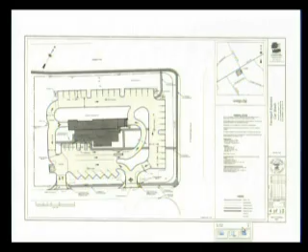As we indicated in our email, we've been trying to implement various aspects of the plan since it was adopted in December 2012 by the Planning Commission, and something we're working on right now is bringing about a downtown, which is one of the key strategies in the comprehensive plan. It was in fact the most important strategy identified by the public as part of that comprehensive land use plan process. There's a policy statement in the plan on page 5 which says that all town decisions should be consistent with the comprehensive plan.

If you have a project that's proposed to be inconsistent with the plan, either that needs to be amended or the plan itself needs to be amended. Since the Planning Commission did adopt the plan, we feel that decisions that come before the Commission should be consistent with the plan, or the plan needs to be amended in that regard. The staff would recommend to deny this site plan at this location because of its inconsistency with the comprehensive plan and the fact that the town is currently working on blending the comprehensive plan with the zoning in the mixed-use town center area. Also, we have reviewed the site plan.

The comments are at your places. There are a lot of comments left, 30 items. Many of those are administrative, and some of them are reminders, but that's still a lot of comments that typically in and of itself would be grounds for denying the site plan. That's kind of an overview of this project. I know the applicant's here and they can discuss any specific questions if you have any.

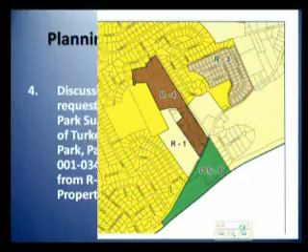Moving on to item number 4, discussion and public hearing on a request to rezone Villas at Anchor Park subdivision, located on the north side of Turkey Creek Road across from Anchor Park, parcel 59, tax map 152, and parcel 001-034, tax map 153 IB, 29.17 acres, from R-4 to R-1 OSMR.

Saddlebrook Properties LLC, applicant. This rezoning was actually approved last month, and it's my fault that it's back here before you because I forgot to include a resolution. Although by state law all that's really required is the action taken last month, which was unanimous, with no opposition or concerns about the requested rezoning, our practice has always been to approve an ordinance through a resolution, so that's why it's back before you this evening. I can review the request if you want - I know 4 of you were out last time.

Basically, the property is currently zoned attached single family R4, similar to Park Place behind us. The request is to go to R1 OSMR, which allows attached and detached, and requires at least 35% open space. So the result of the rezoning would be less density and a lot more open space. Although this proposal by this applicant would be all detached structures, the character is still consistent with the land use plan. So staff recommends approval of Resolution PC-14-05, which recommends approval of Ordinance 14-10.

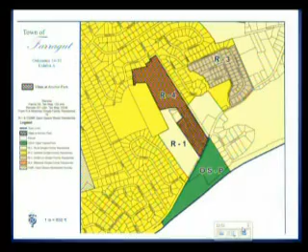Item number 5 is discussion and public hearing on a concept plan for Briarstone subdivision, formerly the Villas at Anchor Park subdivision property, located on the north side of Turkey Creek Road across from Anchor Park, parcel 59, tax map 152, 29.17 acres, Saddlebrook Properties LLC applicant.

This is related to the previous item, the Villas at Anchor Park property. As I mentioned last month, in order to proceed with developing the property under a different zoning district, they have to change the concept plan, the preliminary plat, and the final plat. The concept plan before you has 56 units and 40% open space, so it satisfies the density and open space requirements for the R1 OSMR.

There's one existing attached building that has been constructed in the development, on the south end. Right there, very nice building. But the developer has found it will be more marketable to build detached structures, and the OSMR zoning district allows the attached building to remain compliant while allowing the developer to build detached dwelling units in the remainder of the development. That hopefully will blend in. I'm sure it will, they build very nice looking houses, so it should be compatible.

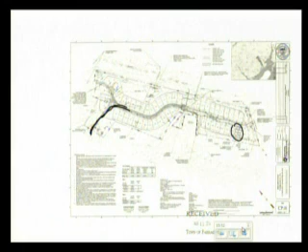In the fire code updated as part of the 2012 codes we adopted in 2013, there's a requirement that where you have more than 30 dwelling units, you have to provide a secondary access. So that's the main comment. The other comments are at your places, relatively minor, but staff strongly encourages a vehicular connection into the property.

We have a number of subdivisions that have that and have had it for years: Fox Den, Village Green, Country Manor, all three are connected. Sequoia Hills in the city of Knoxville is very interconnected. It has a mixture of all kinds of housing types, even commercial, schools, and all kinds of things like that. So it's good planning practice to try to connect where possible.

In this case, it's very possible. You have two roads stubbed out into the property, and it's consistent with the plan. I know the applicant does not agree with me, but that's okay. That's the staff's position on this particular concept plan. Other than that, we recommend approval subject to the conditions at your places.

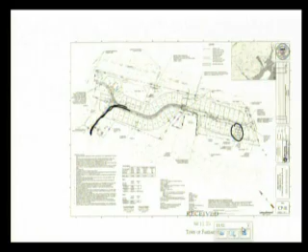Hi, I'm Bob Money. I'm the president of Saddlebrook Properties, and we're at 122 Perimeter Park Drive.

We have not acquired this piece of property, so this is all contingent upon what happens tonight. But what we plan to do on the piece of property is build our product much like we've done with Baldwin Park on Boring Road and the Cove at Turkey Creek. Our market is mostly empty nesters, young professionals for maintenance-free living.

To acquire that buyer, one of the things they are very concerned about is the safety they have in their community. People buy in maintenance-free communities as empty nesters. They're looking for a place where they can lock it up, leave, their yard is taken care of, and it's a safe environment. This was already approved for 99 units without a connection to the rear property.

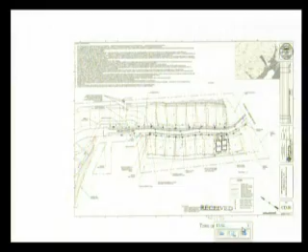So staff recommends approval of the preliminary plat, subject to the 9 comments at your places. Do applicants have anything to add? No, he covered it pretty well. They graded those duplexes with about a 3-foot step in them, so we need to go back and make single-family lots, and there's a handful of either water or sewer service meters that need to be relocated with the new lot lines that we're working with First Utility District on. So you're okay with the $50,000 letter of credit and all 9 items? Yep, we're fine with all 9 comments.

Any comments from the commission? The haul route that is being referred to on item number 6 - can you put that up and show us? Yes. Is that doable? Is that going to work when you're obviously trying to rebalance the site?

Well, we're robbing dirt from the back to finish the grading in the front, and I think the concern - we're aware that we would be crossing an existing greenway trail that was put in by the prior developer, which we will have to replace if it's damaged due to our activities. I think he was making that comment just to make sure we were aware we're responsible for that greenway trail, and we are.

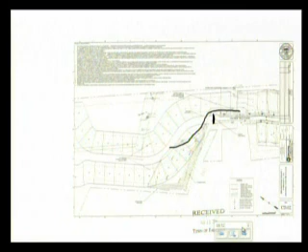So yeah, everything up to this point's been constructed. Let's pay for it. So the haul route is basically just a graded out area. It'll have to be provided with rock or something so it's not creating sediment issues. But it does cross the existing asphalt trail section right here that basically stubs out to that huge specimen tree at the top of the hill, which has a mulched transition from the end of the asphalt trail to the asphalt walking trail in Inverness, over to the east. He's got a note on the plan that talks about the trail having to be repaired if it's damaged.

Another concern of mine is to make sure that all the activity stays outside of the drip line of that tree. I mean, that is a gigantic tree - probably one of the biggest, if not the biggest, trees in the town. That's a couple hundred-year-old tree, and it appears to be in very good condition.

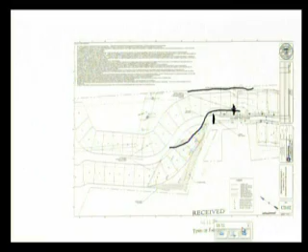And you guys keep your truck drivers away from that tree? Yeah, well, we'll have the tree protection fencing around it, and we've already engaged with Curtis Cassiano, the arborist who put together the plan to save that tree for the previous development. So he's familiar with the tree - he actually did some tree doctor work to it to help it, and he has a recommendation on where that no-disturbance zone needs to be. But obviously we're not wanting to harm that tree. That tree is a huge asset. It's a beautiful tree.

I was telling him the other day, you just kind of want to walk up and lay down under it. It's really a nice tree. Yeah, that's probably about the drip line of it there. That's how big it is. To put it in perspective, it's 5 feet in diameter, so it's a gigantic oak tree. Like Mark said, there's not many of those left in town. It's a real amenity for the project. It really is.

Any other comments from the commission? Being none, have a motion for approval subject to the items. I'll make a motion for approval subject to the items. I'll second. All in favor say aye. Aye. Opposed? Ayes have it. I'll turn the gavel back to Madam Chairman. Discussion and public hearing on the, thank you all very much.

Discussion and public hearing on a final plat for Unit 1 of the Split Rail Farm subdivision, parcel 98.01 and 98.02, tax map 141, 35 lots, 37.6 acres, SRF Holdings LLC applicant.

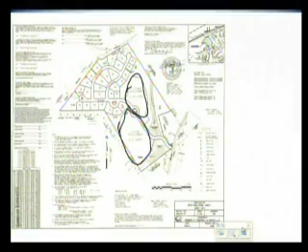And you're okay with these 8 items here? Yes, ma'am. I just would like clarification on item number 1, specifically the permanent stabilization, the 90% rule. I'd like to have some clarification on how we determine what 90% is and what y'all are looking for, so I can plan for that.

Yeah, typically what we do is the areas that were disturbed as part of the construction, at least 90% of those areas have to be, the goal is a uniform, evenly distributed stand of perennial grass, so that you have a rooted vegetative surface that's coming in. It doesn't have to be a manicured yard by any means, but it has to be a rooted ground cover that would hold the soil in place, so that if you have a heavy rainfall event, you don't keep losing soil and eroding into your storm sewer system.

It's really more to his benefit to get it stabilized, because it's more he has to keep cleaning up otherwise. So there's some challenging areas on that property that probably are going to have to be matted for sure. And he is coming into a time of the year where you could probably reasonably get fescue to germinate. It's a little bit early, but with the right mixture, and as much rain as we've had here lately, that would be possible to try. Part of the problem is it's too wet to get it graded so that you're ready to apply the grass seed or the matting. So it's tricky, but we can't sign off on the final plat if you have a site that's really kind of unstable, and it's not secured.

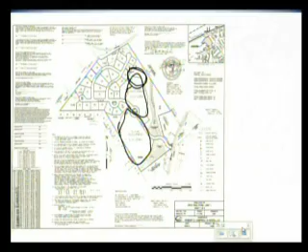I'm gonna throw something out. I've actually had a lot better success out of grass mat. Obviously, if it's red clay, you're not gonna get anything to grow on it, but with some topsoil, even though grass mat is probably a little more labor intensive, I'm not sure it's necessarily any more expensive than hydroseeding unless you happen to own the hydroseeder. If you had grass mat, the other recommendation I could do is maybe put in like a 20% mixture of annual rye, and that annual rye will come right up.

Before the matting? Yeah, we'll do rye. Obviously you want to seed it before the matting. I assume you're putting down Kentucky 31, as well as annual rye. But annual rye will pop right up. Yeah, it will die. So you don't want to put a lot into it, but if you want to get a quick stabilization, then the grass mat - usually you can buy the grass mat in 9 to 10 foot wide rolls, and you just unroll it and staple it down. It protects it from the birds eating the grass seed.

It retains the moisture. I've done a lot of hydroseeding and grass mat, and I've always been disappointed with the hydroseeding. I've always had good success with the grass mat. Historically, it's kept the town pretty happy and maintains erosion control.

We did hydroseed it once already, using a 25% rye mix, and maybe 10% of it took. So if we hydroseeded it with an acceptable mix and then matted over top of it, would that be considered acceptable?

That area is not a good candidate for hydroseeding, it's too steep. First of all, you need to get with engineering to get the water directed away from it, because that's the problem.